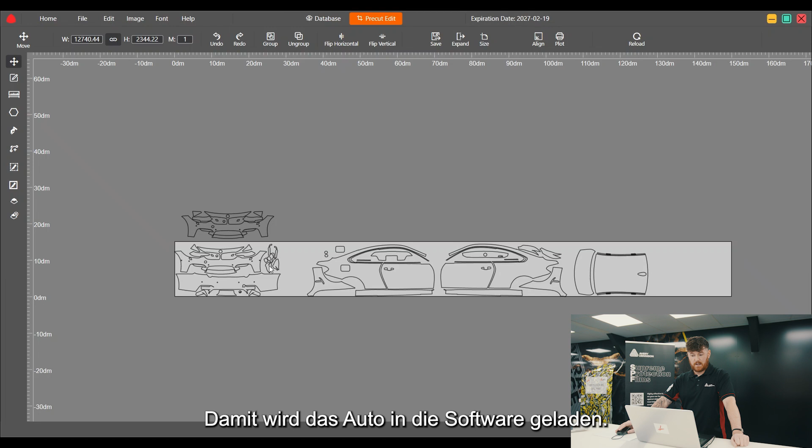Then again, we just move through the drop downs, if it's a convertible or a coupe. And then once it reads data, we know we've got the pattern here, so we simply click the open button, and this will then load the car into the software.

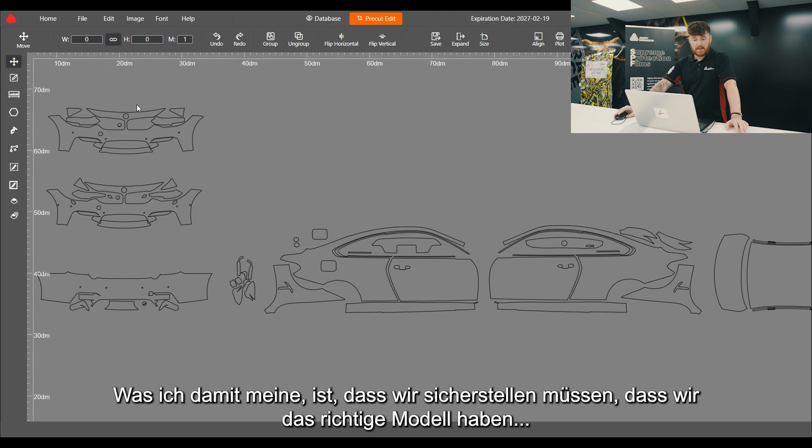Once we've opened the correct car that we need, it's very important that we cross-reference against the actual vehicle. What I mean by that is we need to make sure we've got the right model, so we're going to cut and install the correct pattern.

For example here, we have two different front bumpers. We've got the pre-LCI, which have the washer jets into the bumper under the headlights, and we also have a post-LCI that doesn't include the washer jets. So again, it's important that we check these against the car.

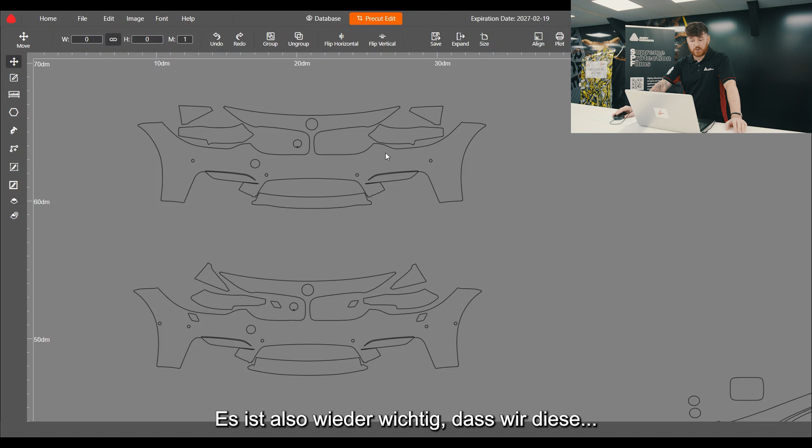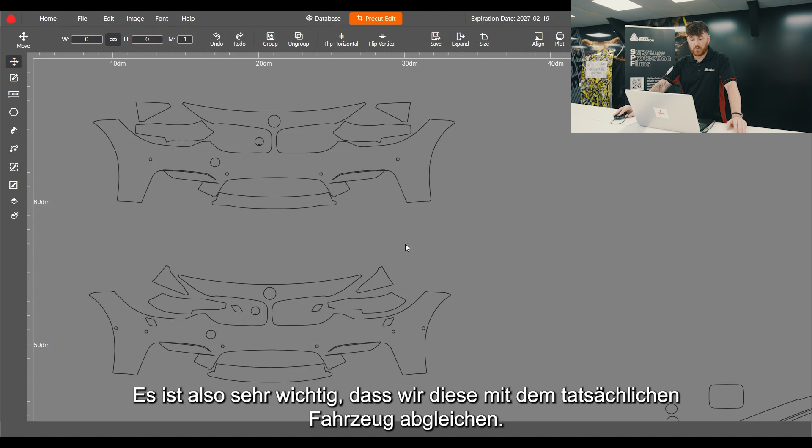As we can see here, from these sections that run from the rest of the bumper, we can see they're a different shape. One of them allows for the carbon kit on the vehicle and one of them doesn't. So again, it's very important that we're checking these with the actual vehicle.

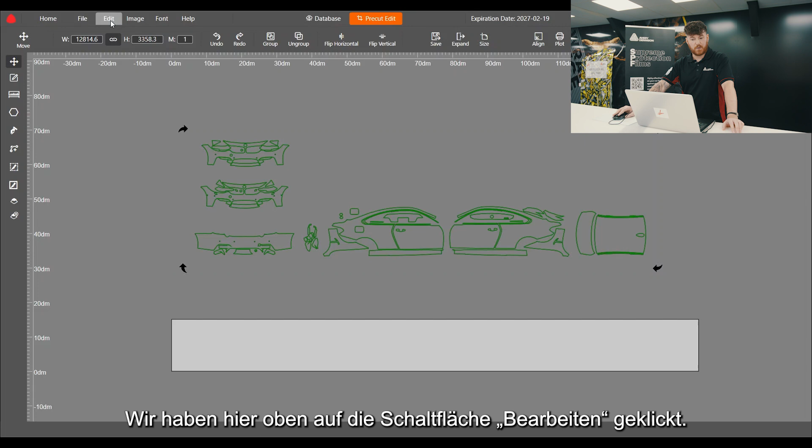Once we've done that and we're happy, we're then ready to start adjusting and tweaking our patterns. So once we've got everything open, we simply select, hit the edit button up here, copy, and then hit the paste button. What that does is it copies and pastes everything here.

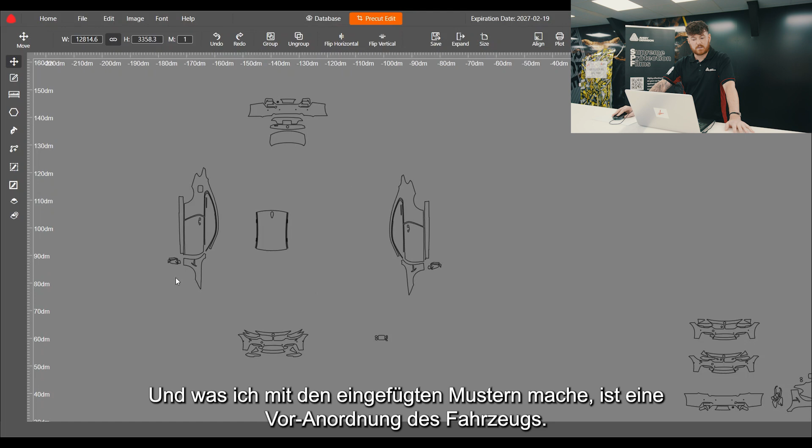Once we've done that, we can then start tweaking. I will just remove these, as I've already prepared this, just to make things a little easier. What I do with the pasted patterns is I pre-map the vehicle out, and again I'm just doing this very simply to show you, as I've already prepared this.

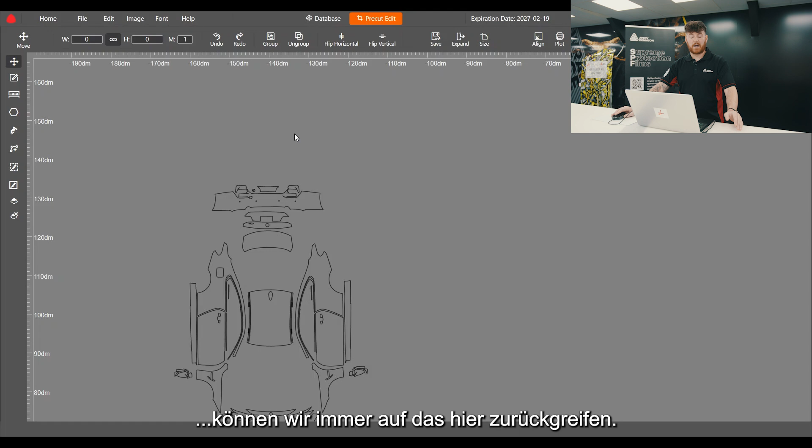We simply map the car out in bird's eye view. The reason we do this is it just makes life easy when we're adjusting or tweaking any patterns - we've always got this to fall back on. So if we make any adjustments and they're not correct or we're not happy with them, we can simply look up here and see a pre-mapped version of the car.

Sometimes when you're working with patterns quite small, it's hard to tell where they're situated. So again, we can just look up here and know that this is for the wing mirror, or if it's a section from the boot area, we've got them as a reference, okay?

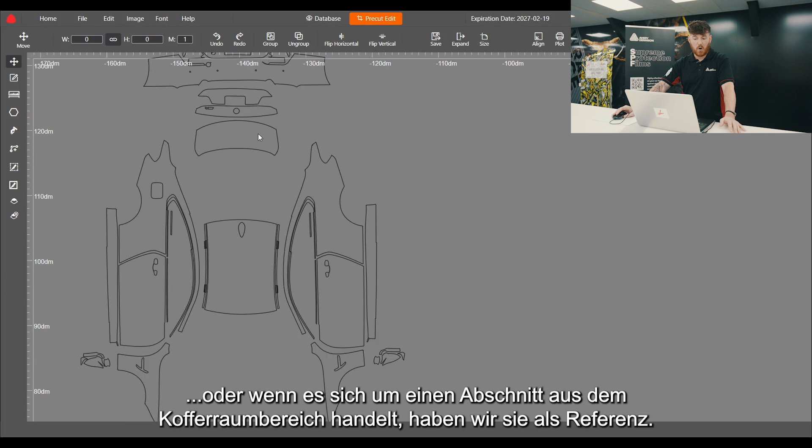And now, once we're ready to adjust any patterns or tweak any patterns, it's important we do this up here. The white box indicates the film that we're going to plot on. And then once we've plotted on this area here, we simply move them below, which you'll see shortly.

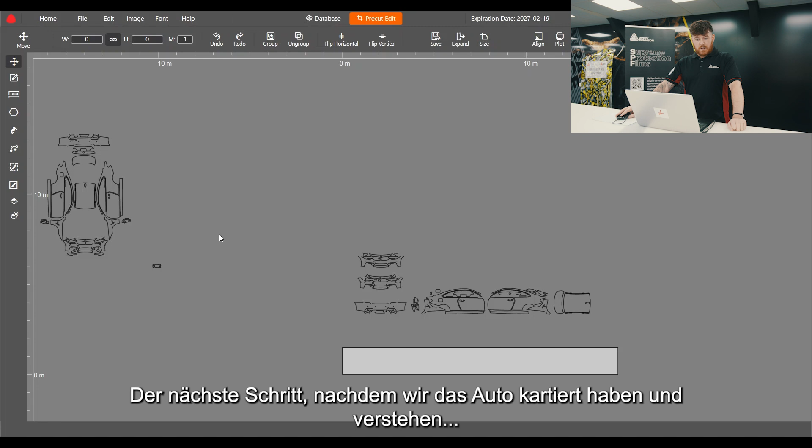So the next step, after we've mapped the car out and we understand where each piece of pattern is going to be situated, now we can delve into working through the editing tools.

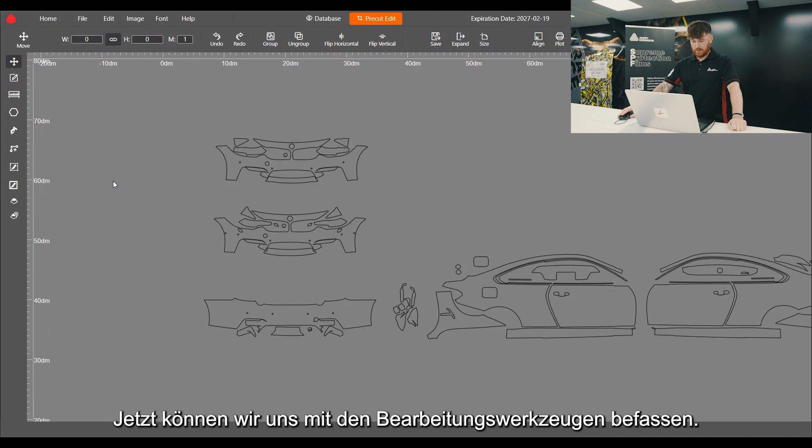And this is where it's important, where we set customer expectation, and they understand what we're going to take off the vehicle, if anything. For example, if we're going to start removing door handles, then we can simply remove this piece of pattern or this section of pattern so we get a more seamless finish, okay?

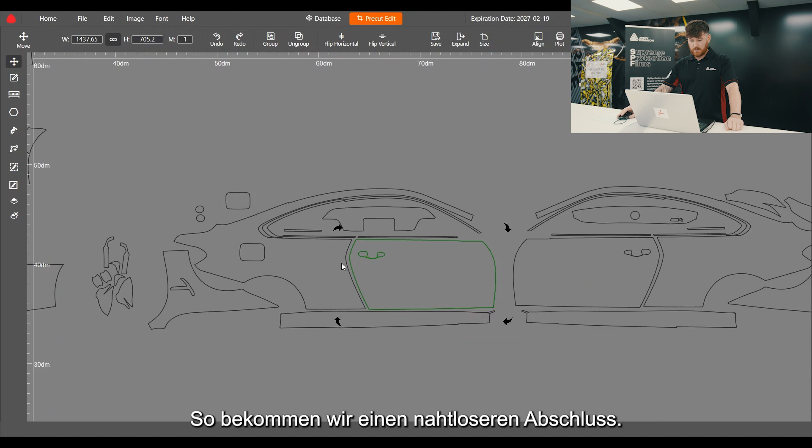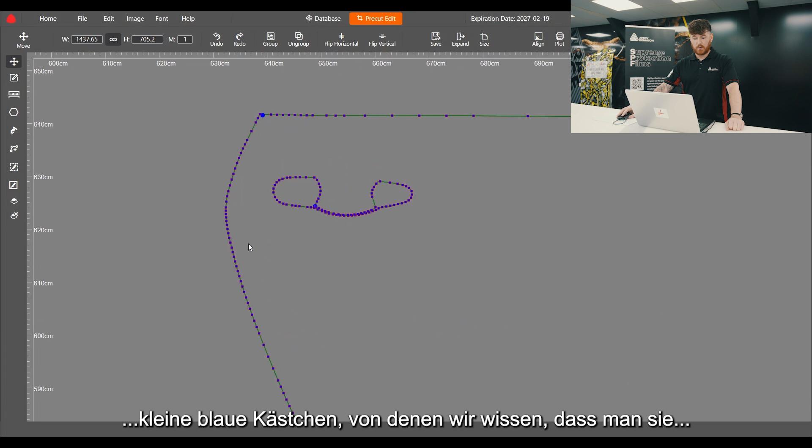So we can simply move this up here just so you can see. And the first editing tool here on the left hand side is simply edit. It's important that we have the pattern selected, so it's highlighted in green, as you can see here. Then once we hit the edit tool, you can see it brings up all these small blue boxes, or what we know are called node edits.

Very simply, we can draw a box over the door handle section here. Once they're highlighted in white, as we can see, you simply hit the delete button on the keyboard and that will remove the door handle. And then once we go back to the move button, there is our edited pattern.

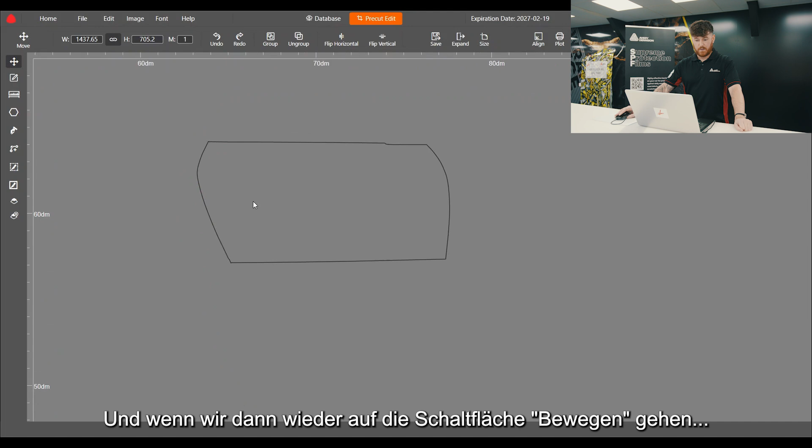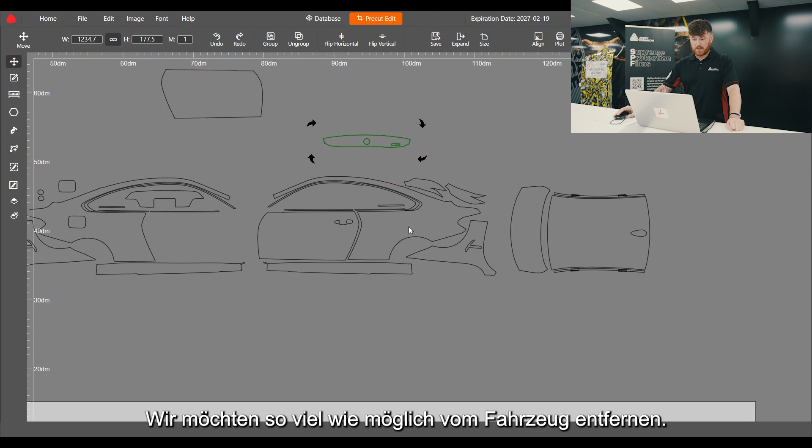So very simply, we highlight over the door handle and we can remove it. And it's important that we set customer expectation here, because they may be under the understanding we're not going to remove anything from the vehicle. If this is the case, then we simply leave these in here. For us, we like to take as much off the vehicle as we possibly can, again making sure the customer is happy with that.

The same goes for badges. So we can simply hit the editing tool again here, and we can highlight the areas, simply hit delete on the keyboard, and we can remove the badges like that.

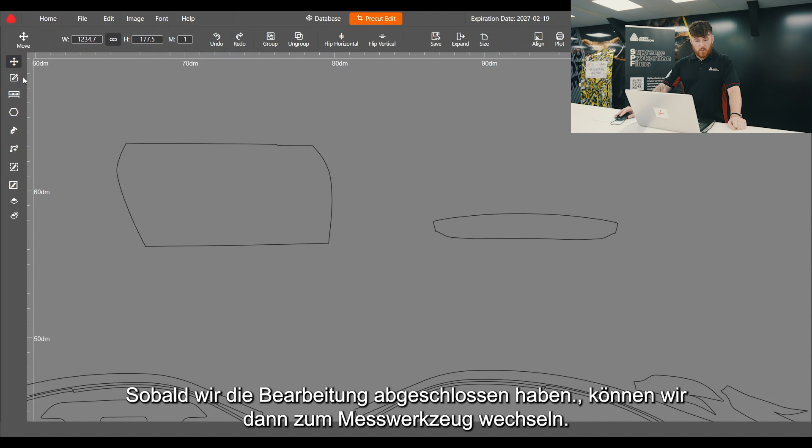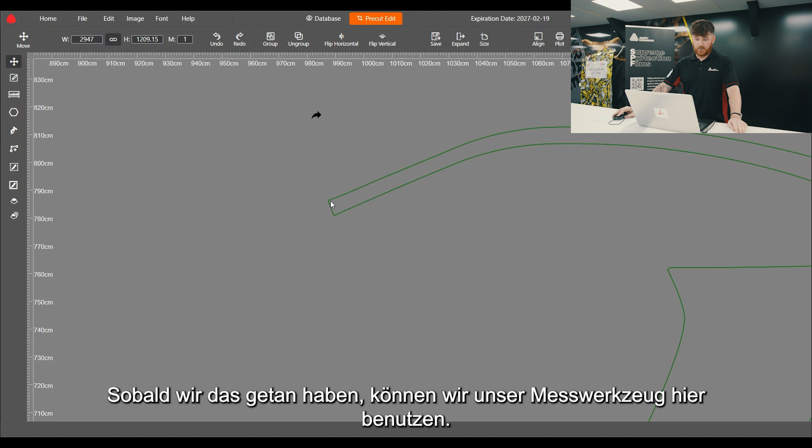Once we've done the edits, we can then move down to the measure tool. This is also very good if we're only going to do a front end package only. So again, we simply use the rear quarter as an example here. So what we need to do with the vehicle is measure where we're going to run and edit this pattern to. Once we've done that, we can hit our measure tool here.

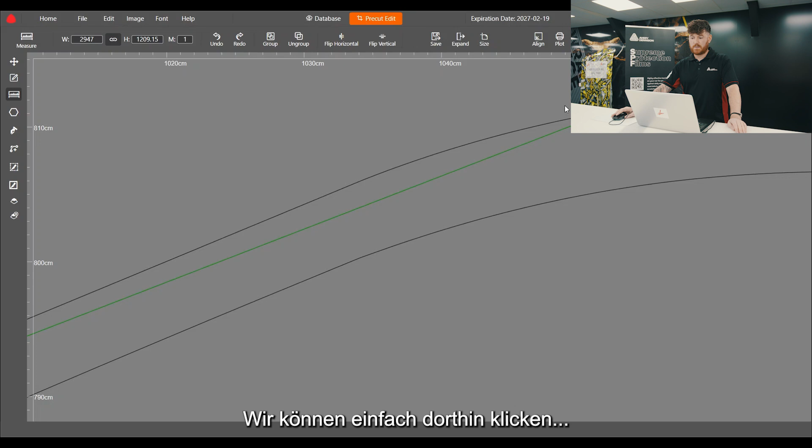And this is a brilliant tool that I use quite regularly. So we zoom in, we make a click down, and we can simply run the tape measure up as far as we need to. And as we can see, it's incredibly accurate. So let's, for example, run to 700 millimeters. We can simply click there, and that will give us our measurement.

Then we hit the move tool, and this gives us our accurate measurement here. So we select the pattern, and then we can make a cut through.

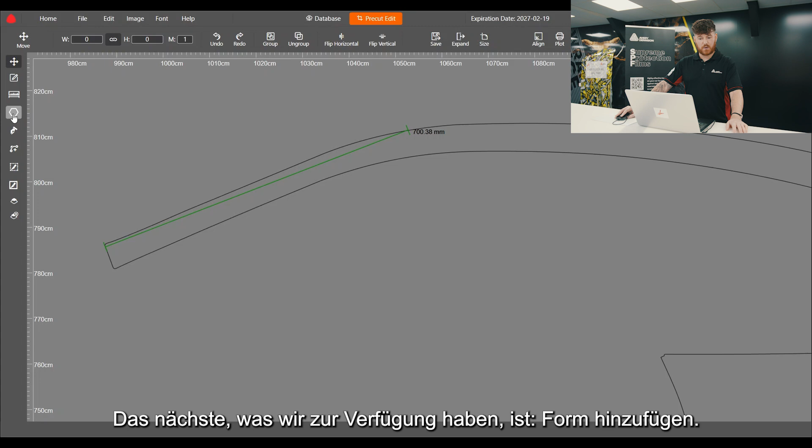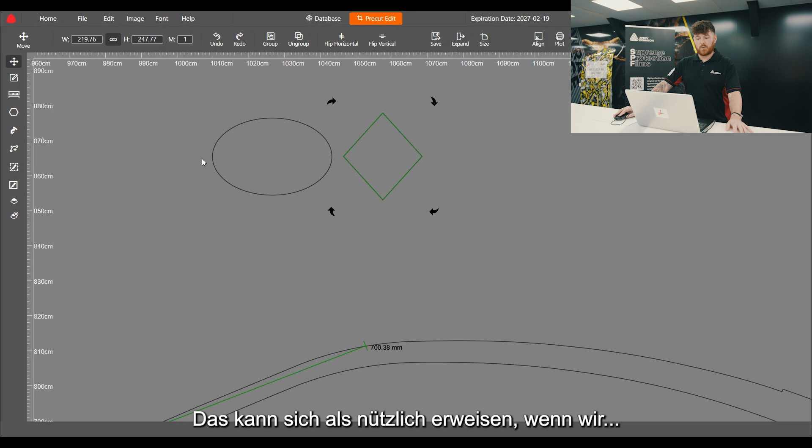I'm going to move down these edit tools in order, just to make it easier for you guys. So the next one we've got available is add shape. And we can simply add any shape we want, whether it's a polygon, rectangle, or round. So again, we can select, and we simply draw a shape, as easy as that. This can come in useful if we're going to make some unique patterns or bespoke patterns, then we can use the shapes. So it's quite good for that.

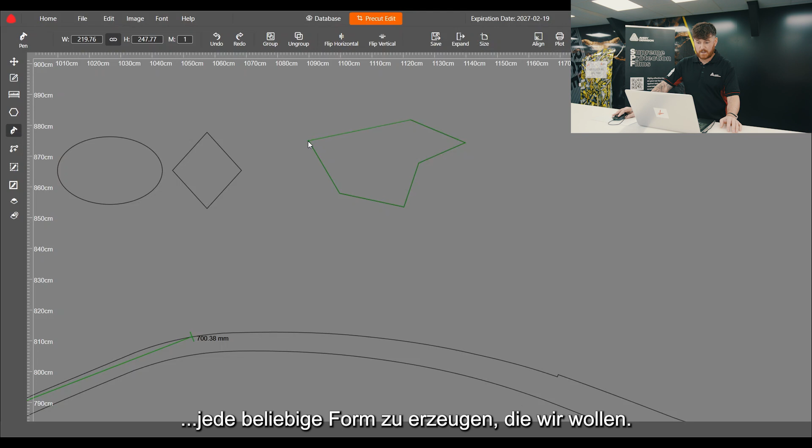Then the next one down is the pen tool, as we can see here. And again, this is quite useful if we're going to make any bespoke patterns, anything that we need to create ourselves. And we can simply just create any shape that we want, close the pattern, and then we run back up to the move tool. And then we have created our very own pattern using the pen tool here.

Once we've finished with the pen tool and we've created our own bespoke pattern, the next one down is the add point.

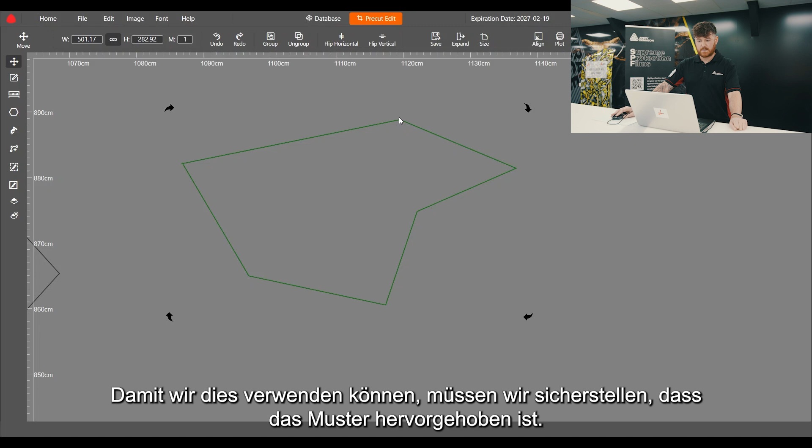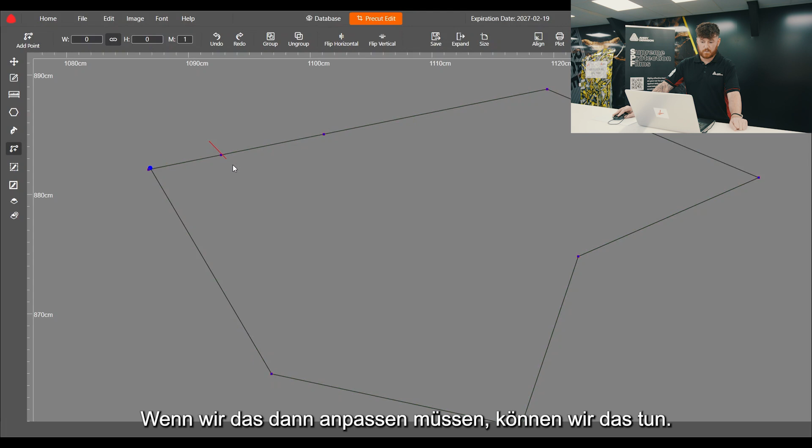For us to use this, we need to make sure the pattern is highlighted, as we can see here in green. We also need to make sure it's on edit, so we can see the blue node edits here. Once we hit add point, we simply draw a line through where we need the point added, and it puts one in for us, as you can see. If we need to adjust that, we can do, and then we've added the points we needed to.

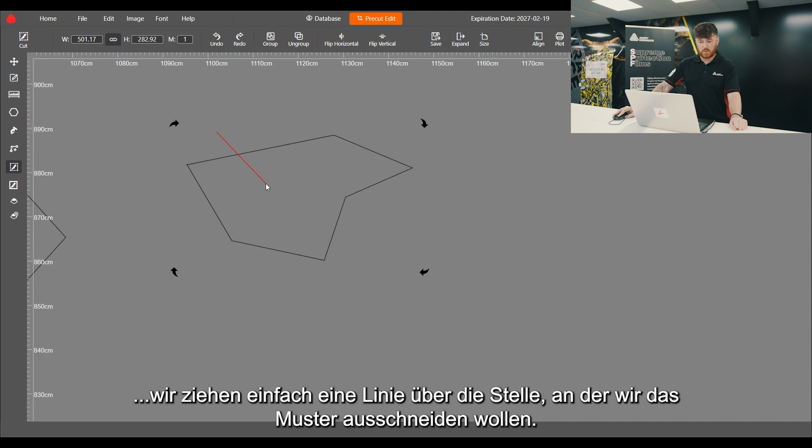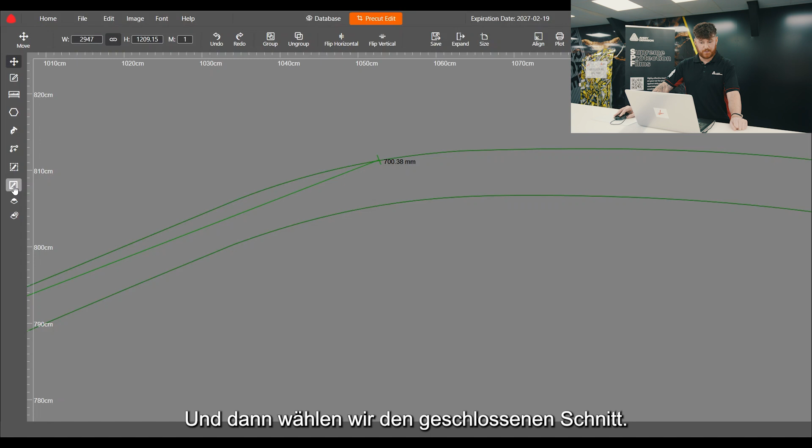The next option down is the cut tool, and this is one we use quite regularly. First, if we're going to make a cut through the pattern, we simply draw a line over where we want the pattern to cut, and it will cut through the pattern. The one we use more often is the closed cut, below. Again, we make sure we select the pattern, and this is where it coincides with the measuring tool I discussed earlier. So make sure the pattern is selected, then hit closed cut, and where the measuring tool is, we make a cut through. Once we've done this, you can see it cuts through the areas we need. This is a great tool for when we're doing a front end package and covering the section of the A-pillars that we need to.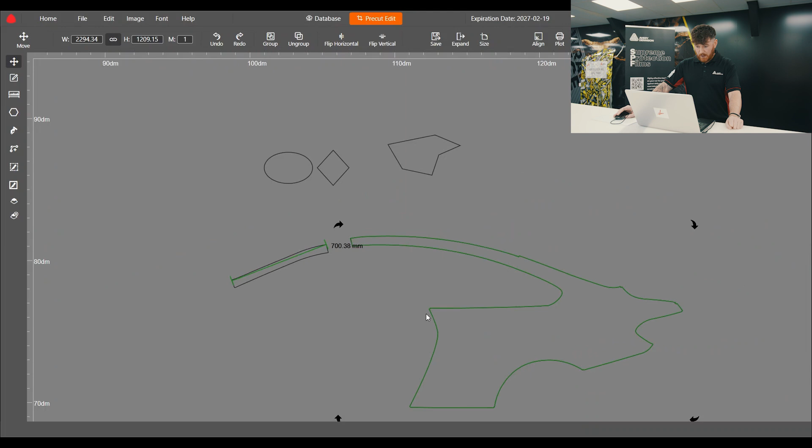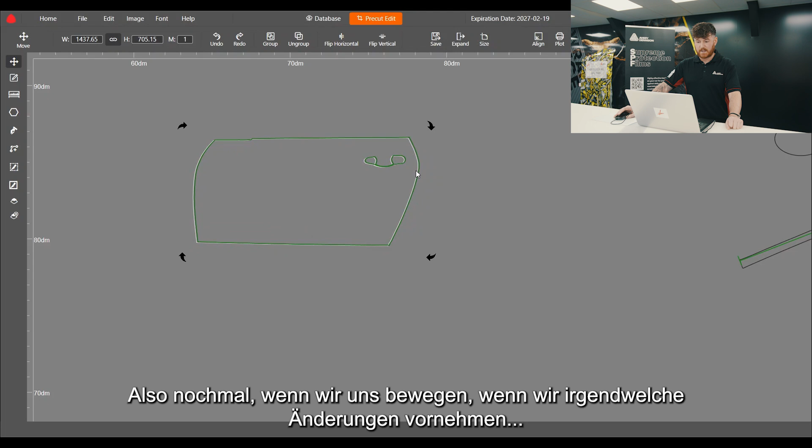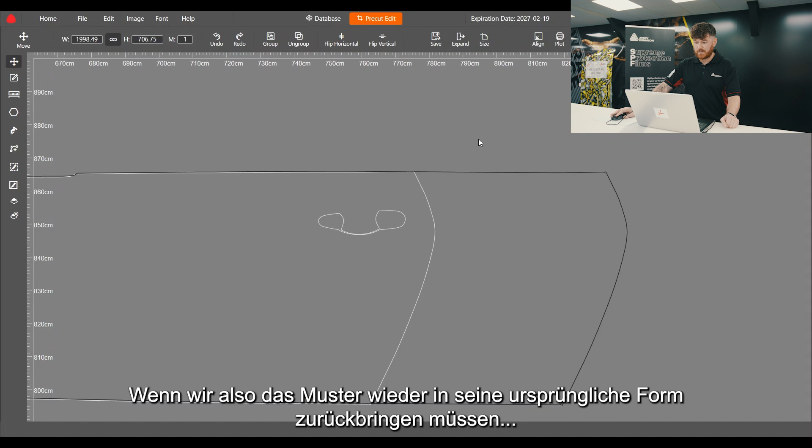We've also got the option of adding shadows, which again is a great tool. We'll use the door as an example. I'll drag this up, and what we do is hit add shadow, then if we slightly move this pattern, we can see it's created a shadow line for us. So if we're making any tweaks or deleting anything, we hit the delete button on the door handle. If we need to extend the pattern, we simply draw a box over these highlighted areas and we can stretch, and this will show the shadow underneath which we've created. So if we need to revert the pattern back to its original form, we've got the shadow there to help us do that. Once you've finished with the shadow, you simply hit delete and it removes the shadow.

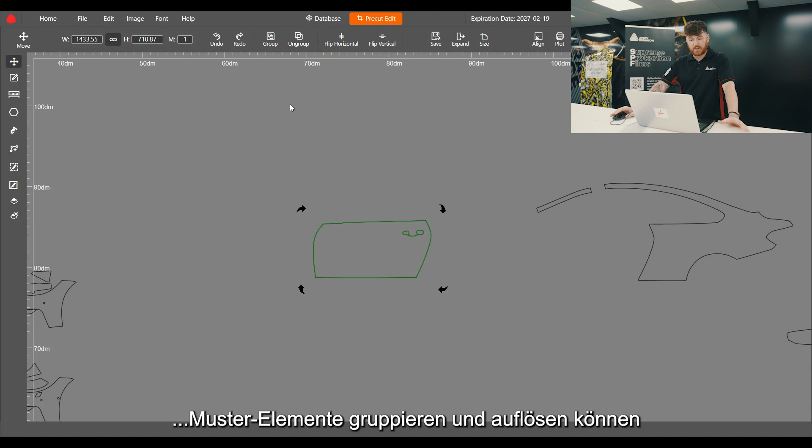After going through the editing tools on the left hand side, the rest are in the top bar here. We've simply got undo and redo, so if we make any tweaks, we can just hit the buttons here. We've also got group and ungroup, which very simply group patterns together and ungroup patterns together.

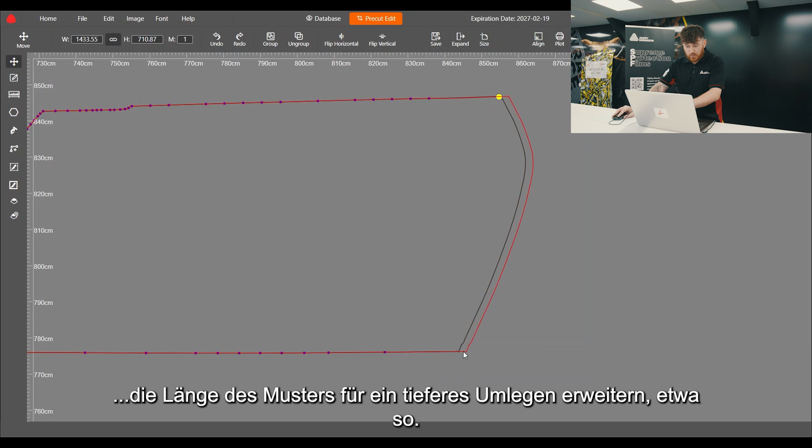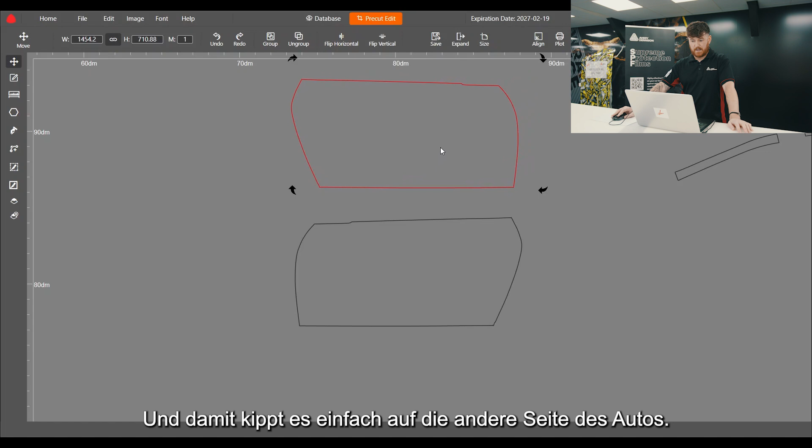Some of the key features we mainly work with are the flips, which I'm going to discuss shortly, and the expand, another great tool. So once we've made some edits to the pattern, i.e. we remove the door handle, maybe we want to slightly increase the length of the pattern for a more wrapped edge, like so. Once we've done that, we simply select the pattern, highlighted in green as we can see. Then we hit edit, copy, edit, paste, and then we hit the flip button here - flip horizontal - and that simply flips it over to the other side of the car. So we're not having to go back to the opposite side of the car making the same adjustments, wasting time. We can simply use the flip tool here, so it's a very, very good feature. You've also got the option of flipping vertically if need be.

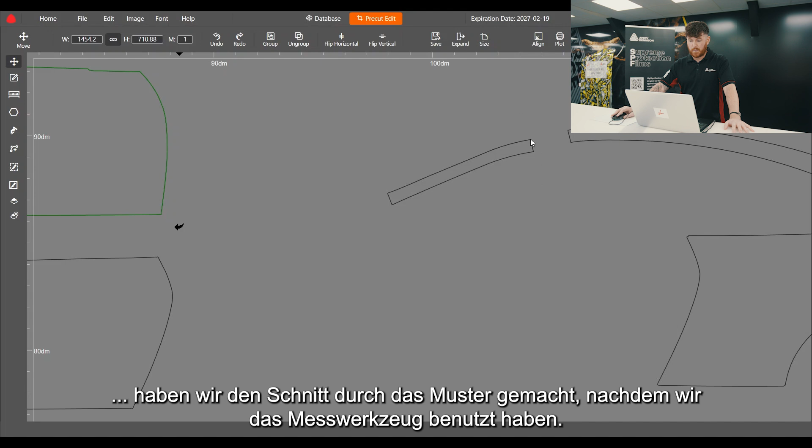The flip tool also comes in very useful here, as we made the edit earlier for a front end package that we discussed. As we can see, we made the cut through the pattern after using the measuring tool. Again, we simply select this, highlighted in green, hit edit, copy, edit, paste - this replicates the pattern here - and then we simply flip horizontal, which gives us the opposite side of the car, so we know both of these patterns will fit perfectly.

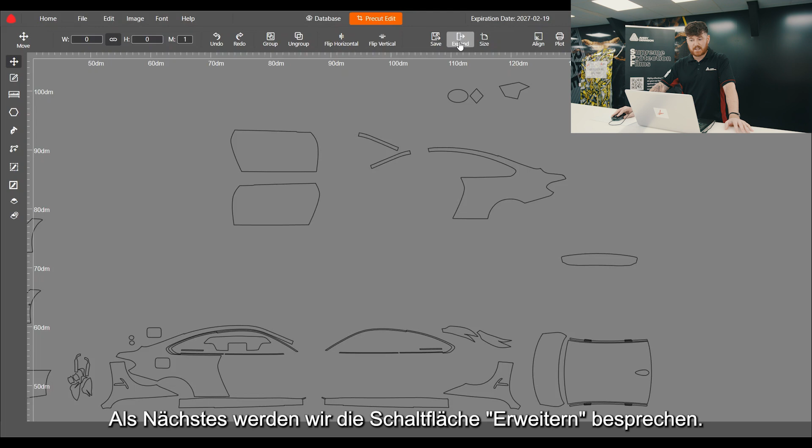So the flip tools are a great feature. The next one we're going to discuss is the expand button here. So again, I'll use this pattern here as an example.

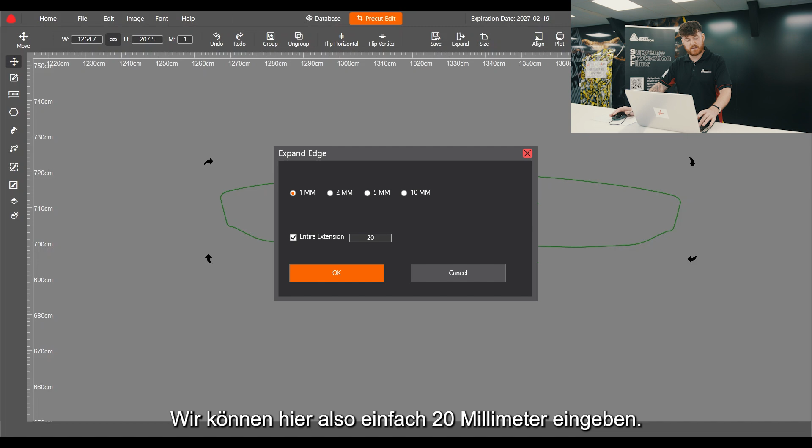Zooming in, it's selected so we can see it highlighted in green. Then we hit the expand button and it brings up this box here. We can expand the edge 1mm, 2mm, 5mm, 10mm, or bespoke. We can simply type in 20mm here.

We also tick the box here for entire extension, and if you watch the pattern in the background, once we hit OK, it simply enlarges the full pattern. So this is a very good feature if we're wanting to create more of a wrapped edge or a bespoke pattern that we need to expand. This is also a very, very great feature.

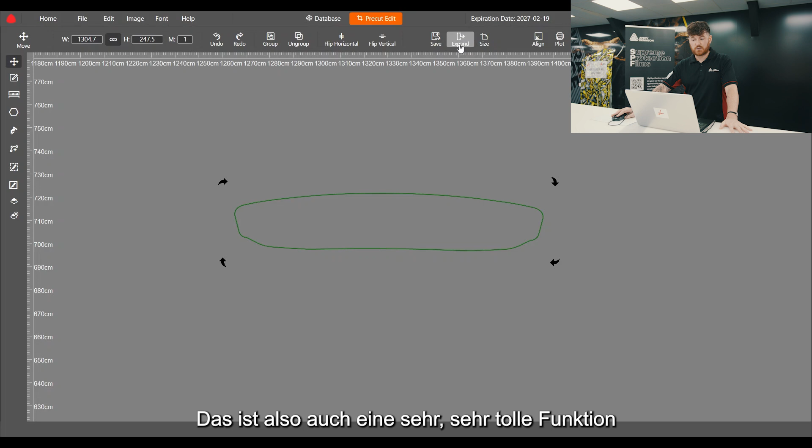And this is all the editing tools now explained. Now that we've finished explaining all the editing tools, it's very important that we now hit the save button.

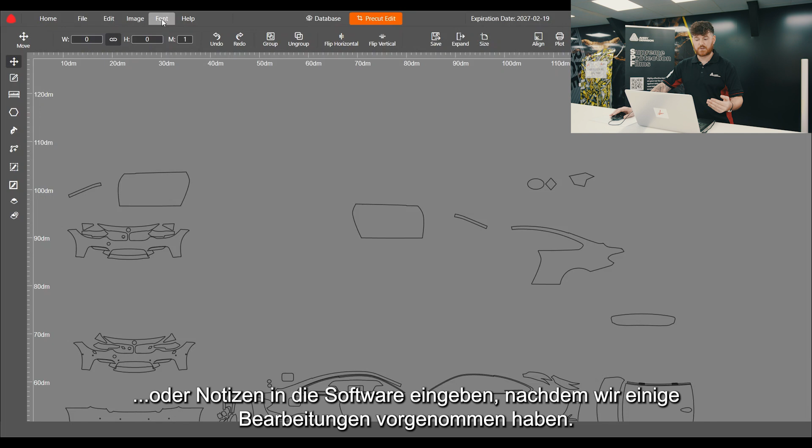Before we do that, we're going to use this font option here. This is another great feature because we can add remarks or notes into the software after we've made some edits. For example, here we've removed the door handle, we've used a section of the rear quarter to create the front end package, and we've removed parking sensors, badges, whatever it may be. We can make some notes.

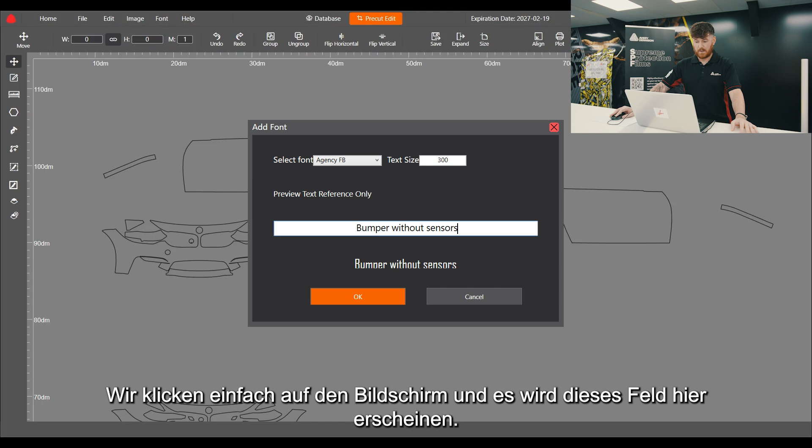So we hit font, add font, simply click on the screen and it will bring this box up here. In here we can write whatever we want. So: sensors removed, badges removed, door handles removed.

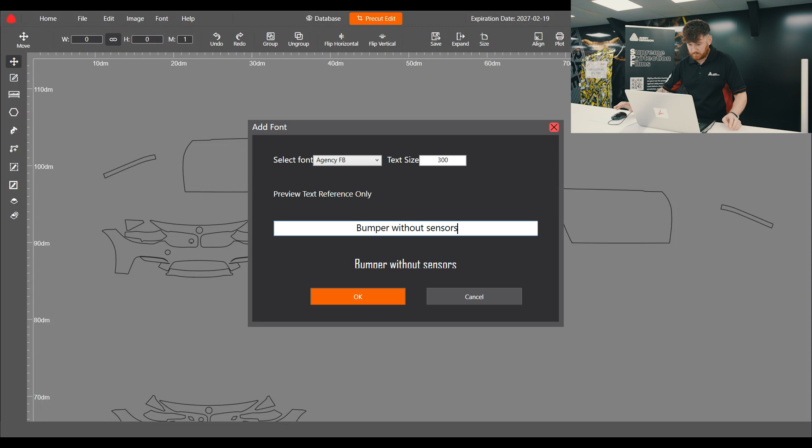And we hit OK. Well, before we do that, you can change the font if you want. You've got many options here. We can also decrease or increase the text size here. Once we've done that, we simply hit OK and it puts the text in here.

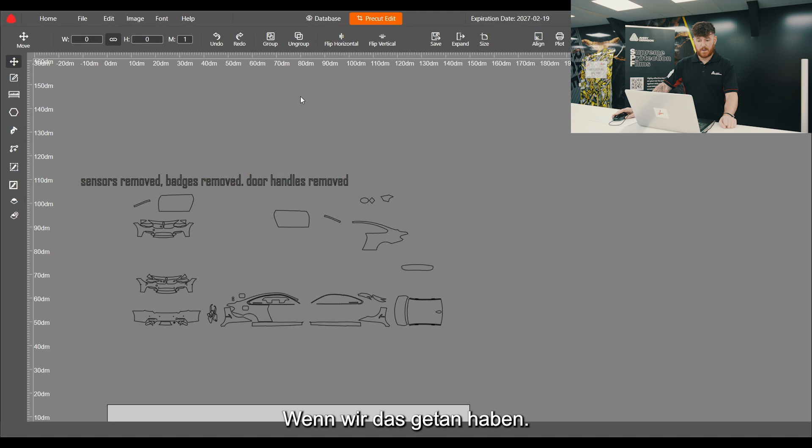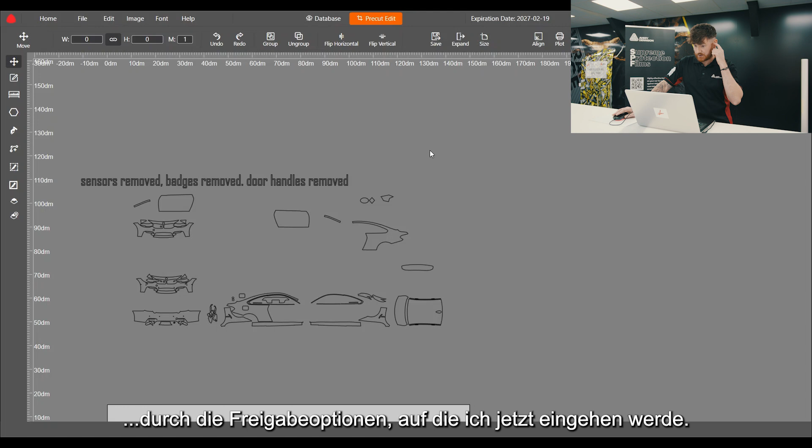So we simply select all that. I normally just move them above the edits I've made to make things easy. So once we've done that, it's a great tool we can use adding the font, and you can make any remarks that you want. It also helps massively when we hit the save button and we start working through the share options, which I'll discuss now. So once we've done this, we hit save up here.

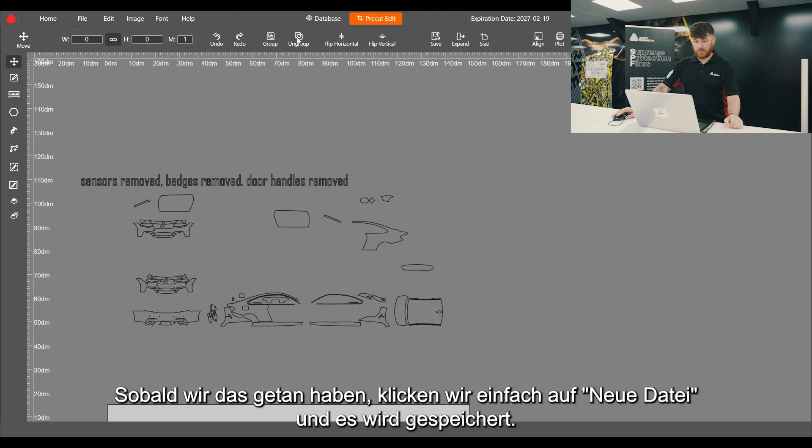Again, we can name the file whatever we need. For me, I always put the vehicle model, maybe the month that we've created or done the work, and we can also put the actual model of the car as well, which in this instance is an F82. Once we've done that, we simply hit new file and it will save.

And it will bring this box up here, so we hit OK, and then now we've got this folder saved. It's a great tool because if we come to do another one of these vehicles in maybe 12 months, 2 years, whatever it may be, rather than redoing it all and re-editing everything, we can simply just open the old file. So it's a great feature.

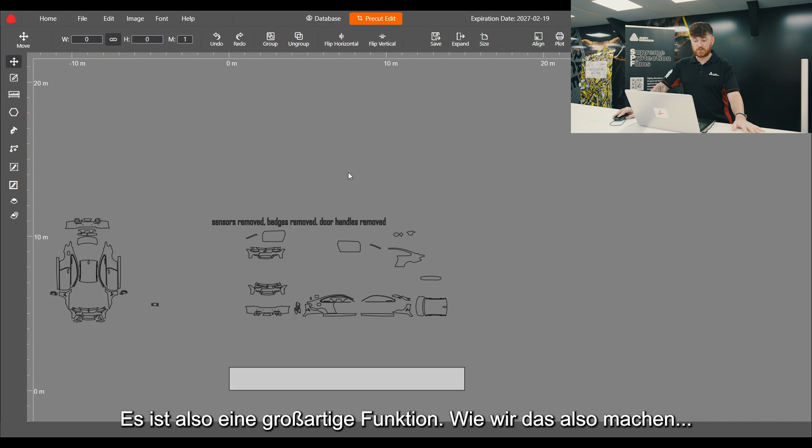So how we do that, we'll go back to the original file. We'll just remove these sections out of the pre-cut edit. So now we go back to the database. We're normally situated here in the general data, so all we do is move over to my data, which is the option here, and this will bring up all the saved options here.

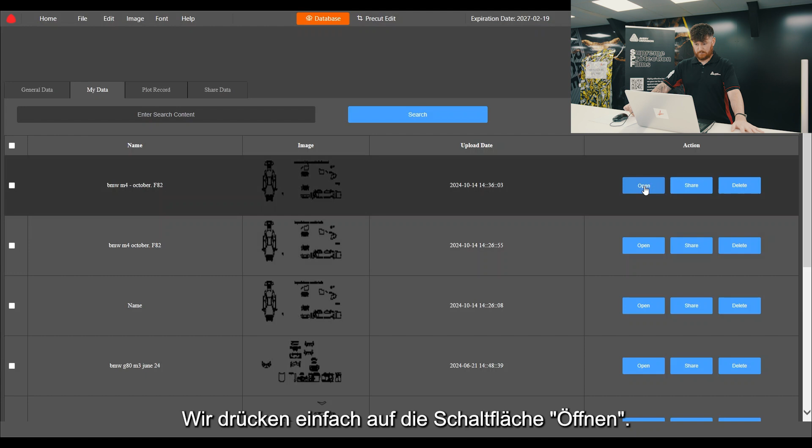All we do, whichever job that we need, we simply hit the open button, give it a few moments, and you can see it brings up everything that we saved in that original file, including any remarks or notes that we made. So it's a great feature for the software.

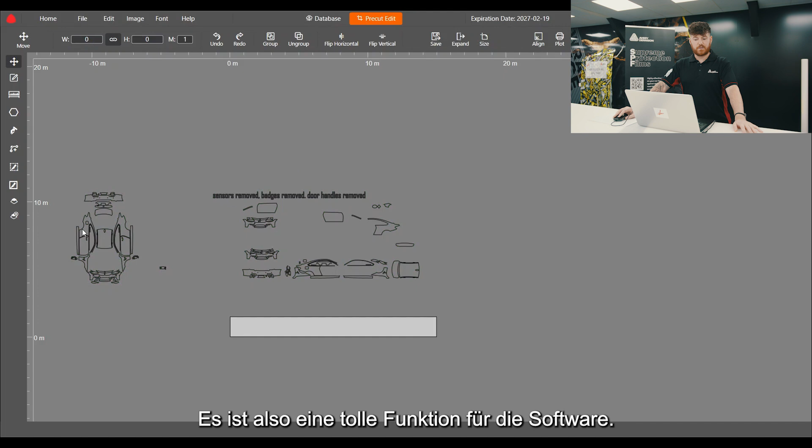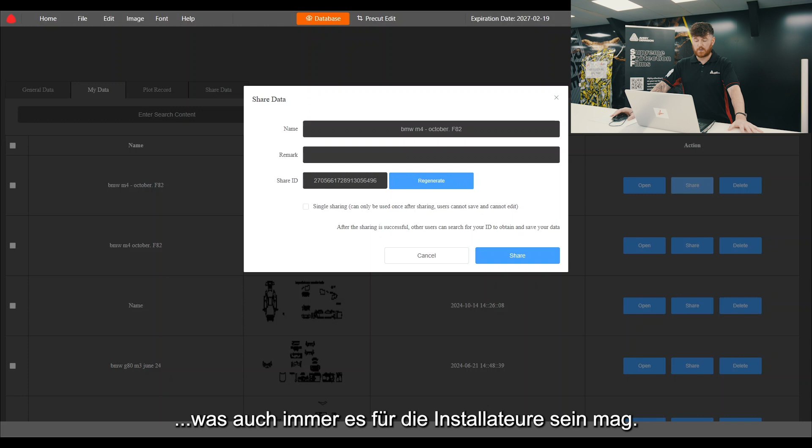Also another great feature, again if we drop back into the database, in my data is the option of share, which is the button here. Once we get more people in the network using this, then this is a really, really good feature. We're looking at creating maybe closed Facebook groups, WhatsApp groups, whatever it may be for the installers, and then we can share these options with each other. For example, if someone approaches me because I've done the BMW M4, the F82 model, I've already installed the patterns, I know they fit perfectly, I can simply just share this file with this person.

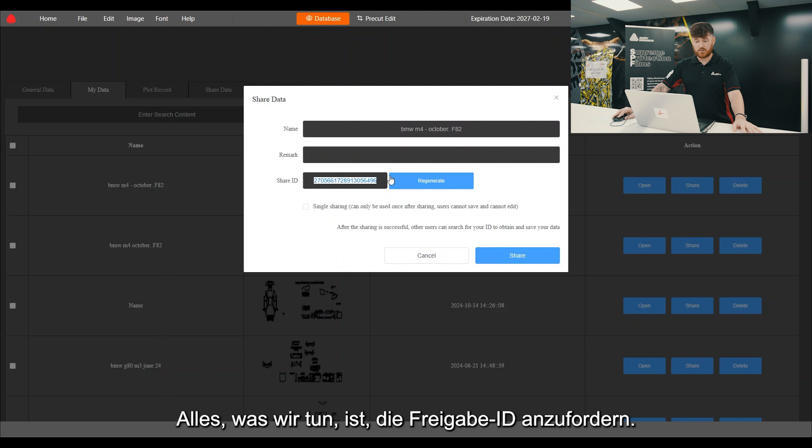We can put any remarks in there that we need to. We all get a unique share ID when we install the software. So all we do is request the share ID, we put that in and we simply hit the share button, and that will then share this particular file with that person.

So it's a really good feature for the software. Now we've finished showing the save options and share options, now we're going to move on to plotting the material.

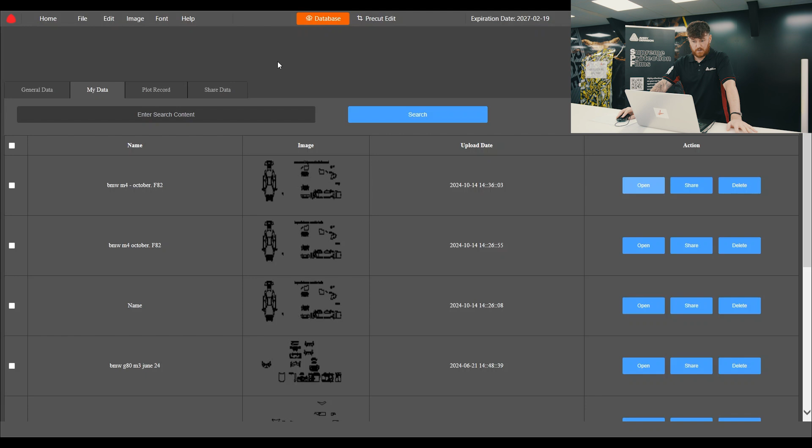So we jump back into the pre-cut edit here. As I touched on earlier in the video, we work above the box here. Anything that we're going to plot, we move into the white box, which is this section here. And then once we've finished plotting, we move below. So now we select this section here and we move this down onto the white area here.

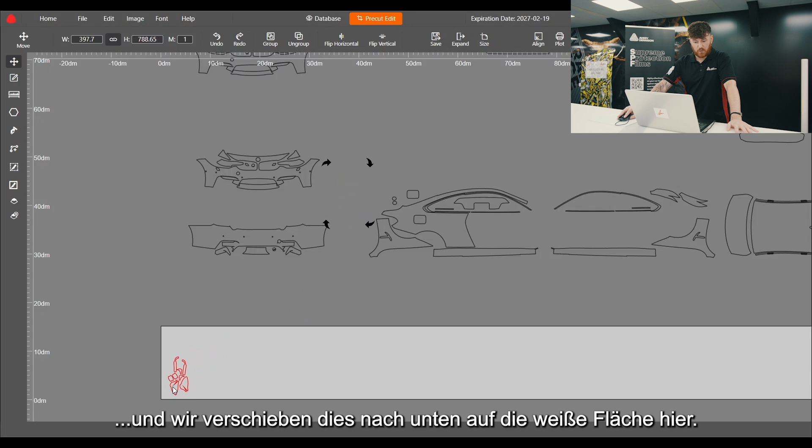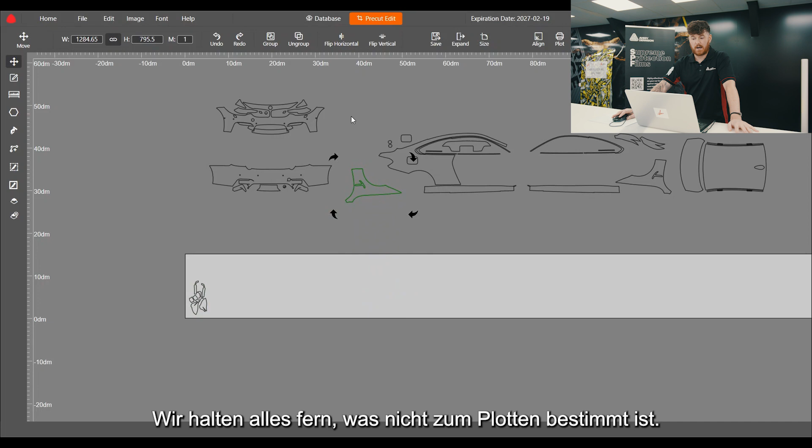Now it's very important that when we're plotting, we only have what we're going to plot on this section here. What I mean by that is, if we accidentally pull this here, even though it's not highlighted, it will still read the full piece, and anything in this section, it will plot. So it's very important we keep everything out other than what we're going to plot.

It's important to work with a nice workflow, and this is why I start at the top and work my way down. So I'm going to highlight these sections here, and these are what we're going to now plot on the machine, which we're going to do now.

Now we're going to load the paint protection film into the plotter. So we start by laying it on the rollers here and pushing it through the rear of the machine. And now we've made sure the material is tracking straight, it's important that we now set the blade to the correct depth.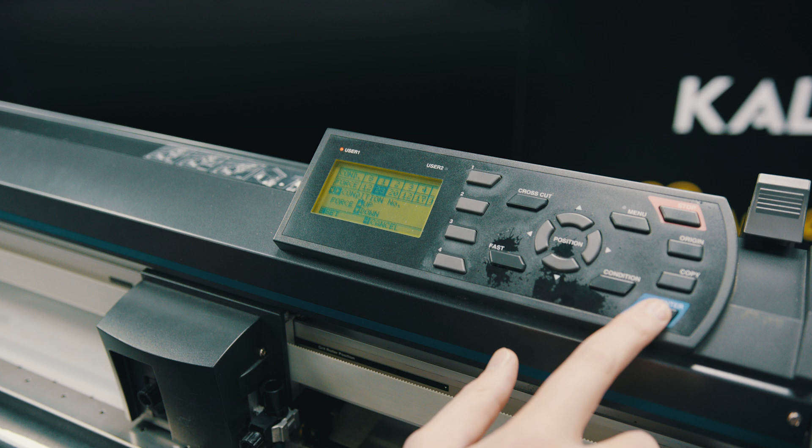Now we've got the machine set up ready to cut. We simply go back to the software, we select the patterns that we need, and we now cut them.

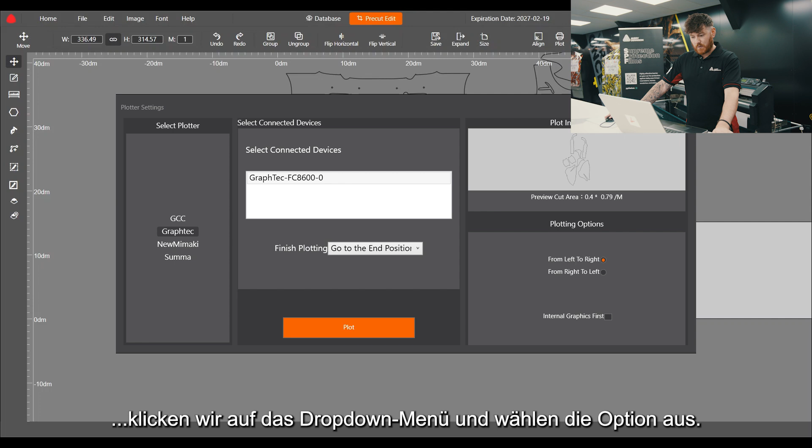We hit the plot button, we select our Graphtec machine, we hit the model here in this box. Where it says finish plotting, we hit the drop down menu and go for the option, go to the end position, because once it finishes plotting the material, it leaves it there and we can simply cut the material off. So once we select that, we simply hit the plot button here and you can hear the machine running, and then we get a pop-up box that says successfully sent.

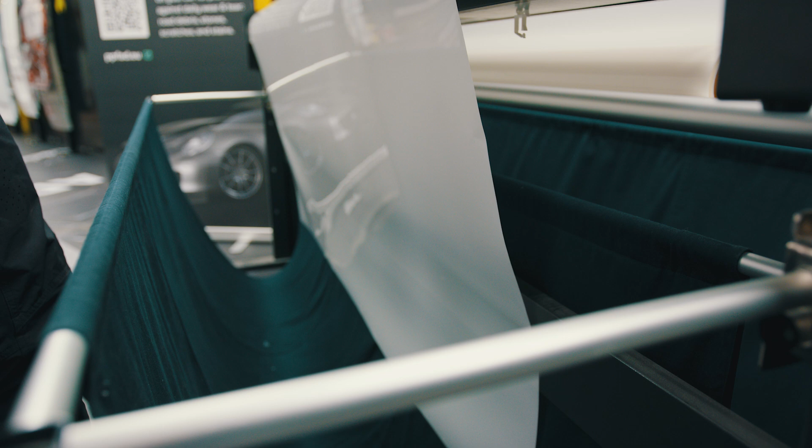Some of the frequently asked questions I get are about pattern availability. So now I'm going to explain why it's important to navigate around these options. For example, we're looking for a Lamborghini Urus Performante. So here we're in European standard. We drop down to select Lamborghini.

This was a new car, so 2023, and as we can see, the Urus isn't available. However, we go back here and select Chinese standard.

We scroll down to select Lamborghini, hit the year, and then here we've got the option of a Urus. In particular, we're looking for the Performante, which is here. Once we've worked through the drop-down menus and we can see the data, then we can open the pattern, and this is the pattern that we require.

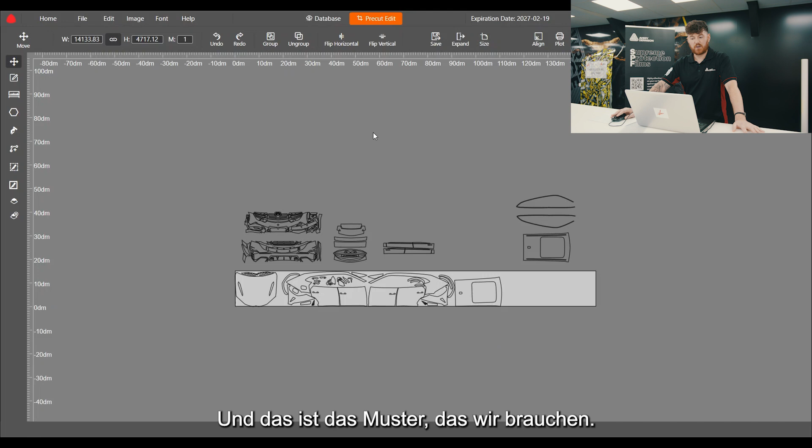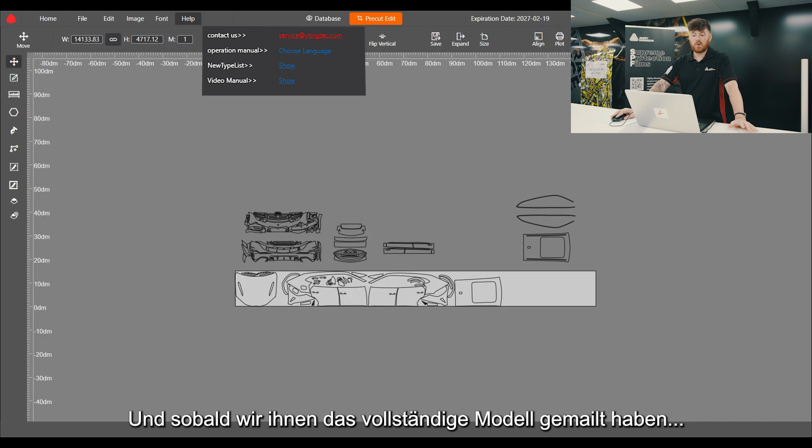If you've navigated around the menus and the car still isn't available, then very simply we just hit the help button here. We copy the email address and we email them with the full make and model of the car that we require. And once we've emailed them with the full make and model, all we're doing is looking for an email back to say that they're working on it and the patterns have been added.

You'll notice every time you open the software, it constantly updates. Patterns get put into the software on a daily, weekly basis. And this is why it's important that the software is always connected to the internet.